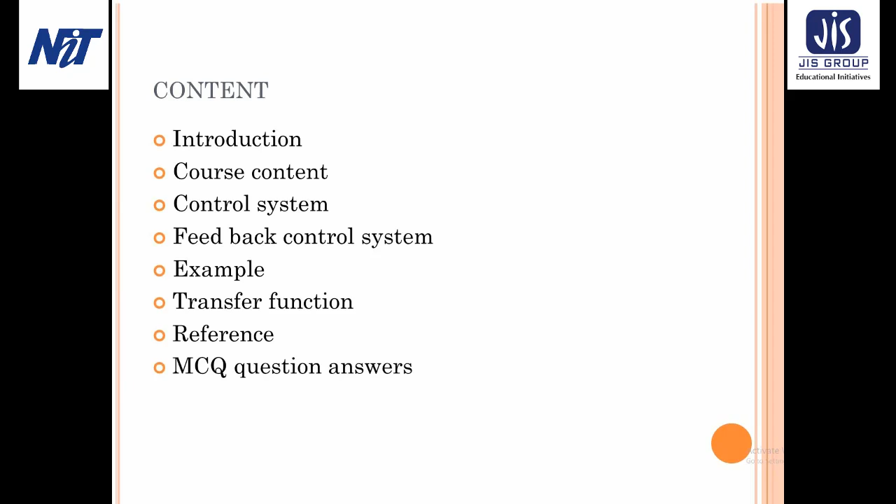Today my first lecture topic is Introduction to Control System, followed by the code EE503. The control system has become an integral part of modern society. It plays a vital role in our day-to-day life. Without being familiar with the terminology of automatic control, people in the past have utilized the concept of automatic control.

Besides its importance in space or missile guidance and aircraft positioning, the control system has become an integral part of our daily life, starting from the bread toaster, room temperature control, traffic control, automobile steering control, as well as economic regulation systems. The control system is not limited to any particular discipline, but equally it is applicable to chemical engineering, electrical, instrumentation, mechanical, civil engineering, and so on.

Now, the launching of satellites, tracking the enemy on radar, or regulating a power plant are some examples of man-made control systems. It is based on the principles of feedback theory, linear analysis, circuit theory, Laplace transform, matrix algebra, and calculus. And it also exists in nature. Within the human body, there are many examples of control systems.

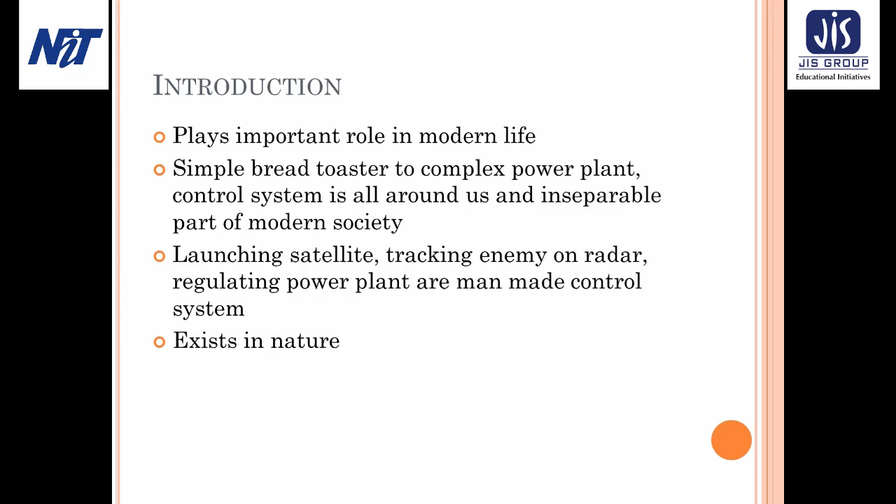And gradually, the classical period of control systems starts after the Second World War. In this age, time domain analysis and frequency domain analysis were introduced and used to linearize the nonlinear system and examine its behavior. As it is not possible to design the control system for advanced nonlinear multivariable systems, with the help of Bellman and Kalman, a new era in the control system had begun. And that is the era of modern control, such as nonlinear control systems and digital control systems. In this Control System 1, that is EE503, we will learn the classical approach of the control system.

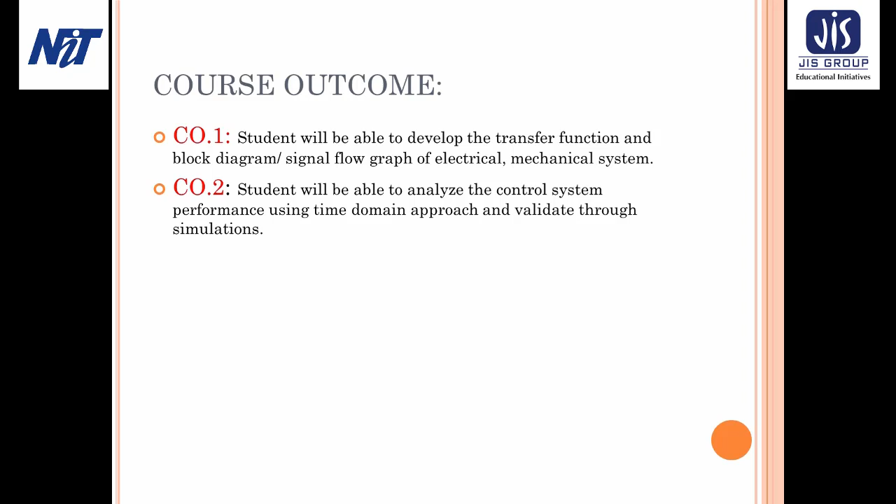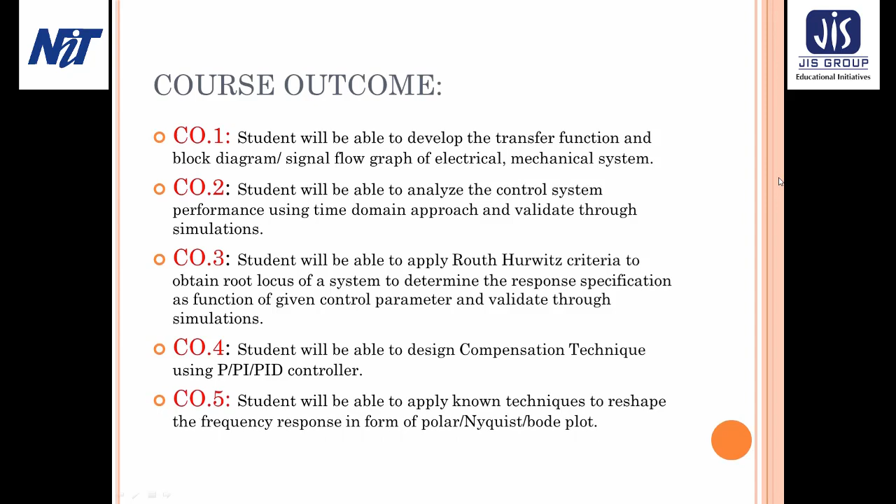So now, what is the course outcome? At the end of this course, the students will be able to design the control system or define the transfer function using the signal flow graph or block diagram, can perform time domain analysis or frequency domain analysis, and can design different compensation techniques using different controllers. So these are the five outcomes of Control System 1.

So what is the control system? It is a combination of two words, that is control and system. Control means to regulate, direct or command a system so that a desired objective can be obtained. And the system is an arrangement or combination of different physical components that are connected or related together to form an entire unit to achieve a certain objective. That means it operates on input, and according to that input, it produces an output. Addition of these gives a control system.

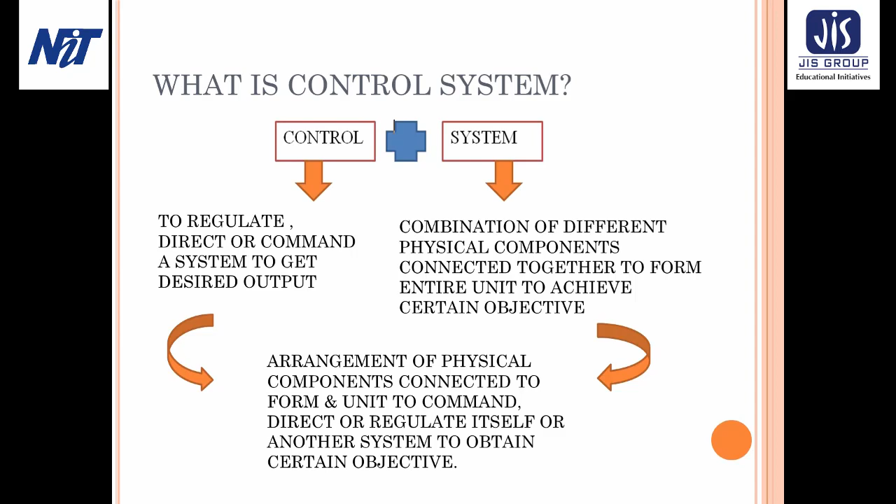So the control system definition is like this: the arrangement of physical components connected or related in such a manner to command, direct or regulate itself or another system to obtain a certain objective. Now a system has some inputs, and according to that input the system will produce the output. Generally in time domain the input is represented by r(t) and the output is represented by c(t). We can use x(t) as an input and y(t) as an output also.

Now the inputs are different types of signals. That means electrical, mechanical, pneumatic, hydraulic and biomedical signals, or different physical variables like temperature, pressure, liquid level or electric voltage; all of these can be used as the input of the system. And according to the input, the system will produce the output.

Throughout this course, we are going to study the single input, single output system. That means only one input will be present, and according to that input, only one output will be produced. Multivariable systems are also possible. That is the MIMO system. That means there are multiple inputs and multiple outputs. But we will consider the SISO only.

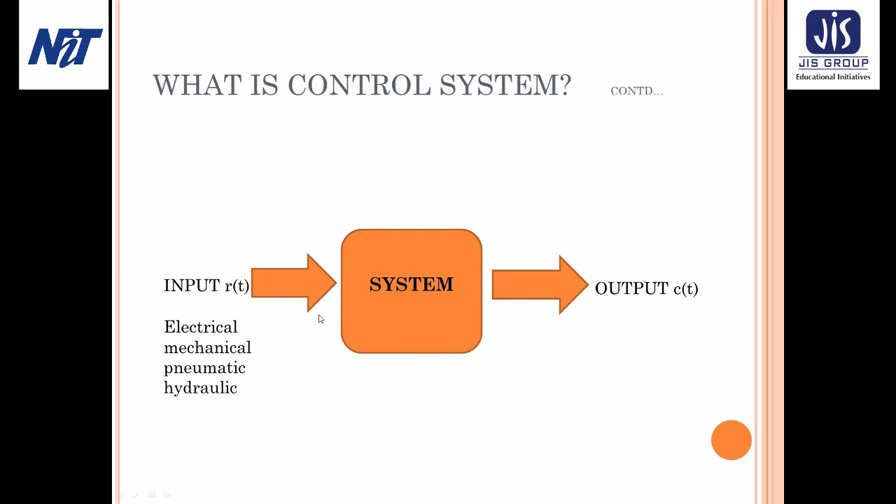Now, in that system, there was no feedback. As there was no feedback, that type of system is known as an open loop system. And then there is a closed loop system, when we use feedback in the control system.

Here, in this feedback control system, R(t) is the reference input, and the reference input goes directly to the controller through the error detector, or this is actually a summing point, and the output of the summing point is the algebraic sum or difference of the different inputs coming to the summing point. So through this error detector, it goes to the controller, and the controller output is produced and goes directly to the plant of the system.

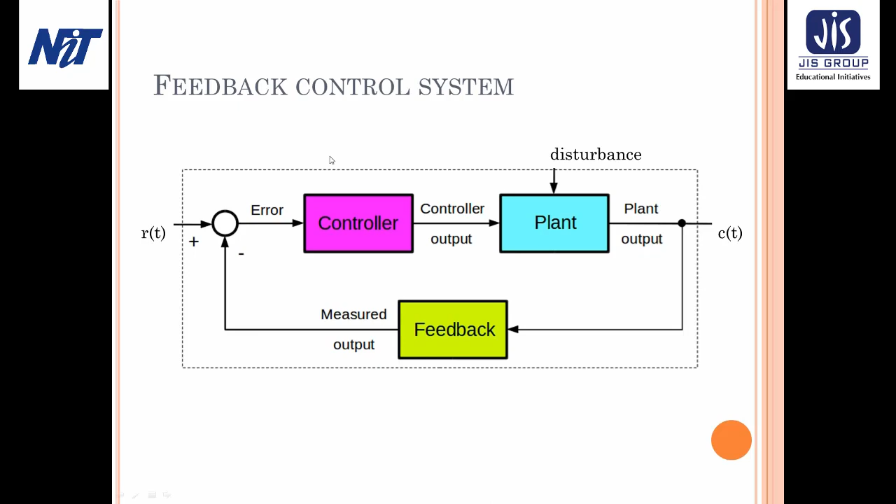And if there are some disturbances, then the disturbances are added to the plant of the system, and next we get the output from the plant. Now a portion of this output C(t) is used as the feedback, and it goes to the error detector, and this error becomes the algebraic sum or difference between R, the reference input, and this feedback. So this is the complete feedback control system.

And different types of sensors can be used. Those are tachometers, accelerometers, LVDT, that is linear variable differential transformer, the thermocouple, strain gauge, etc. Generally, these sensors are used to measure the control variable of the system. Now, the system has input variables which can be manipulated to modify the control variable, and those variables are known as the manipulated variable.

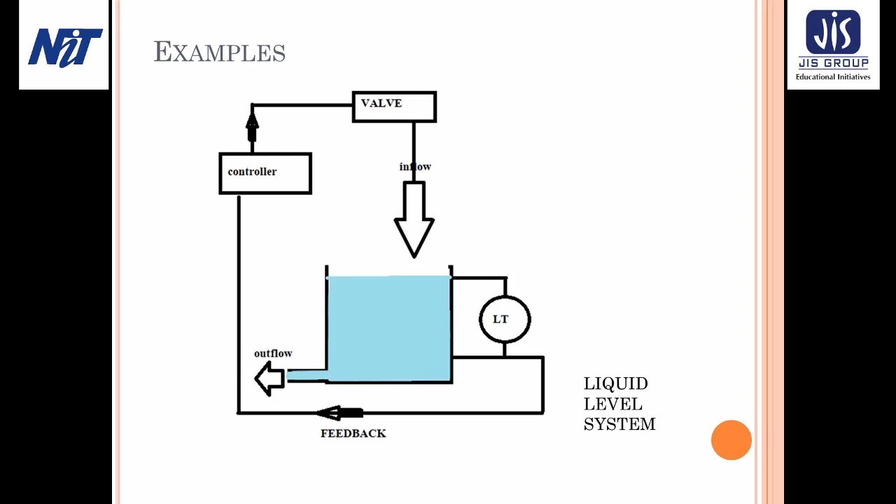And if there is any difference, positive or negative, between the reference input and the control variable, then the controller takes the necessary action to either increase or decrease the valve opening as per the case. So this is an example of a liquid level system.

The next is the transfer function model. Now the transfer function is used in the Laplace domain. In the time domain, we have the input R(t) given to the system, and according to the input R(t), the system output becomes C(t). Now, we can convert all these equations into the Laplace domain. So R(t) becomes R(s) and C(t) becomes C(s).

And in this frequency domain, if we find the ratio C(s) by R(s), assuming that all the initial conditions are 0, then the system will be represented by the transfer function. Or we can say that the transfer function is defined as the ratio of the Laplace transform of the output to the Laplace transform of the input. So this is the transfer function.

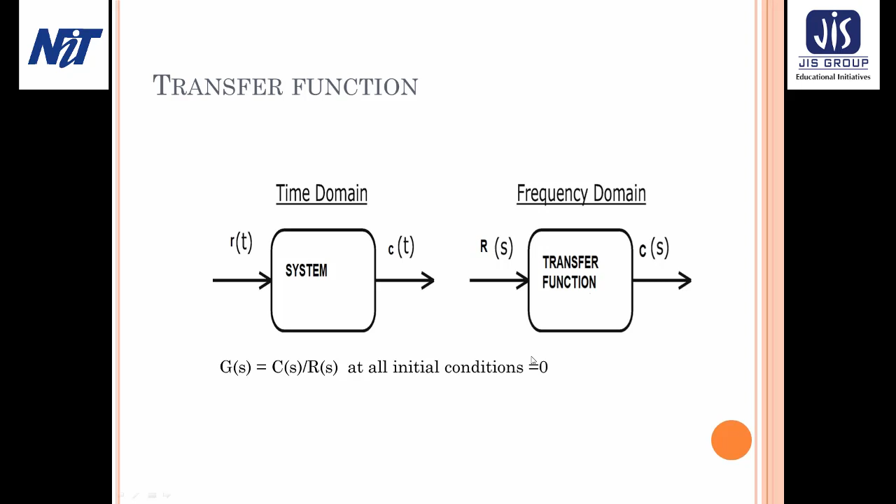So in this lecture, we became familiar with the control system and the basic components of a control system, the block diagram of a control system, and the basics of the transfer function model. Hope after this lecture you have a clear idea about today's topic.

Now we'll go through a question answer session in the context of this lecture. You are requested to go through it gradually and try to solve the multiple choice questions on your own. The answers are also attached at the end of each question.